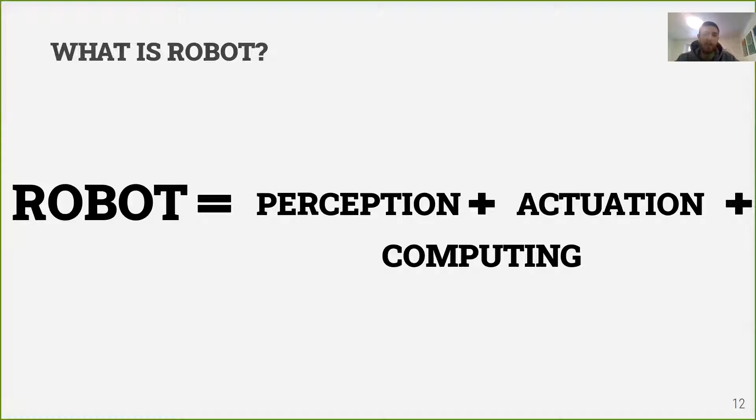It can also perform actuation, so it can interact with the physical world, like move objects, maybe touch something. And also definitely a robot is something that performs computing, some type of calculation or thinking process. So for these three actions, robots are equipped with three different parts: sensors, actuators, and computers. And all three parts are really important and cannot exist and operate one without another.

It's interesting that when we talk about computers, we often imagine modern computers, right? Something electrical which works with current and can perform computations, but it's actually not always the case. For instance, NASA has a project where they built a fully mechanical robot. It only consists of gears basically and mechanical parts, but it still can perform some computations. So basically it has a computer.

If you've ever been to a technical museum, they always have these calculators which are purely mechanical but still allow you to perform some computations. So computers are not always something modern and electronic as we imagine. The same applies basically to sensors and actuators. So it's still not really clear what a robot is.

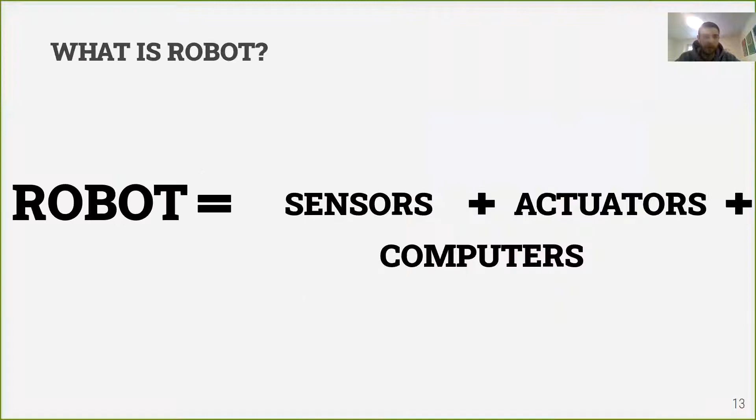It has temperature sensors and encoders because it knows the temperature of the water and speed of rotating, right? It has computers definitely because it has buttons and different modes of operation, and it has actuators because there's a motor inside which can rotate it. So according to our definition, especially this really broad Oxford English Dictionary definition, a washing machine is a robot. And the same applies to an electric kettle, satellite, or RC car, automatic transmission in your car.

So how do you think we can distinguish a robot from just appliances? Any ideas maybe? Come on, don't be shy. Maybe somebody knows. So my version is...

I would say that a robot is something that has all three of that - sensors, actuators, and computers - but also something that has an operating area outside of its body. So a washing machine and electric kettle, for instance, interact with the physical world inside themselves. We have water inside the kettle, and we have our clothes inside the washing machine. So they interact with the physical world, but only inside their body. Usually those are considered more appliances than robots, but it really depends.

Among these, I would say that a satellite is definitely a robot, and automatic transmission is definitely a robot. Considering an RC car, it depends really, because not every RC car has sensors. Sometimes they're just remote controlled cars which do not have any sensors, so they cannot be considered robots in this case. But it's important that there are some robots which are remotely controlled - remote controlled mechanisms can still be robots. There are many robots, especially in space, which are remotely controlled, but they're still robots.

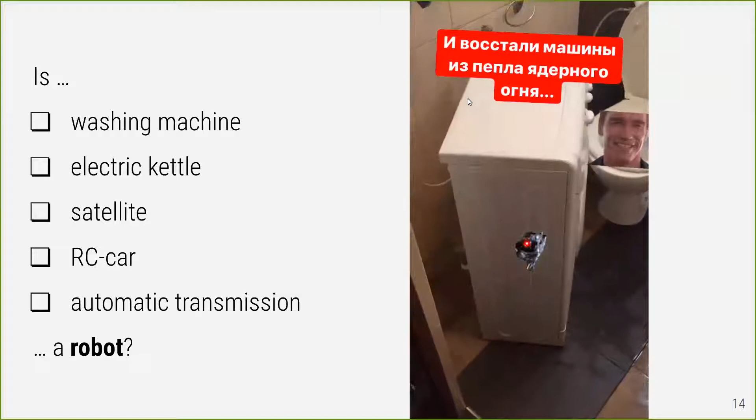As you can see, the definition is really broad, but usually we are able to tell either we see a robot or not, though there are some corner cases when it's not that easy. So there are many types of robots. As you understood already, this course is going to be dedicated to mobile robots, but we will still discuss a little bit which types of robots are out there.

So first of all, there are aerospace robots. There are many of them on the slide, all unique, different, and interesting. For instance, on the left side of the slide, there's a Curiosity rover, really famous - I guess you heard of it. Such rovers can be autonomous, and they can also be partially remotely controlled. They're used to discover other planets and space objects.

What's interesting about Curiosity is that this was one of the first rovers which used visual odometry. This is a really powerful technique in robotics - when using just a single camera, we can determine where a robot is in space relative to our starting position. This technique was first applied in space robots, and then every modern autonomous car or autonomous robot with a camera uses this technique. There are also many more interesting robots. On the right side of the slide, there's a so-called Robonaut.

This is a NASA project. They use this robot in a space station, and they've launched it already several times to a space station. It is built in an anthropomorphic way, so it can operate with all the appliances and tools which are created for people. And there is also a really interesting story about this robot.

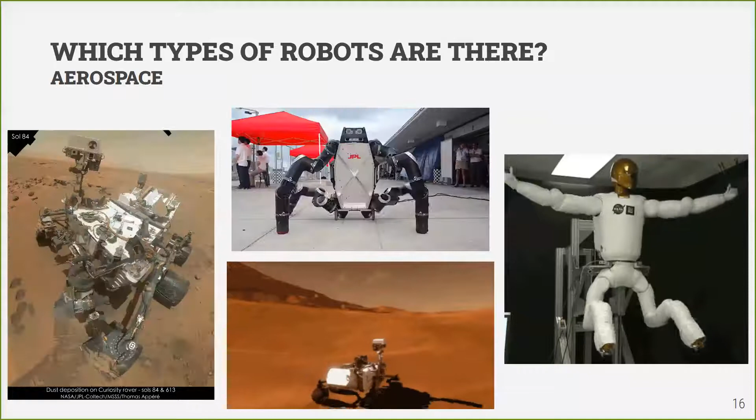So what NASA came up with: they started online translation from Earth to the space station, and they taught engineers on the space station how to fix the robot online. This operation took more than 24 hours without interruption to fix this really complex robot, and they succeeded partially - it was operational, and the mission was conducted in the end.

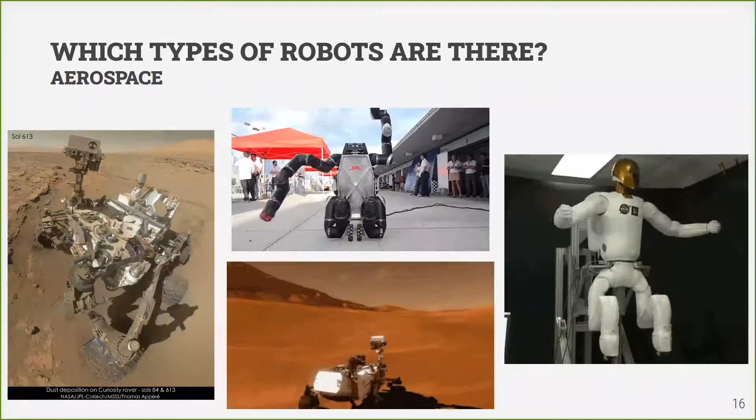Actually, industrial robots are the most common type of robots in the world - about 70% of robots in the world are such types, basically manipulators or different types of industrial robots. So there are also medical robots.

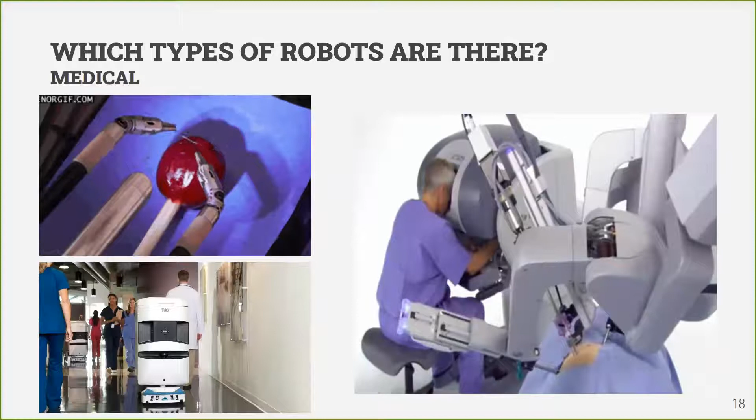And on the bottom of the slide, there is some mobile robot, used I guess in the United States, this one particularly, to distribute pills in the medical hospital. It just travels around the hospital and distributes different types of medical pills and things like that.

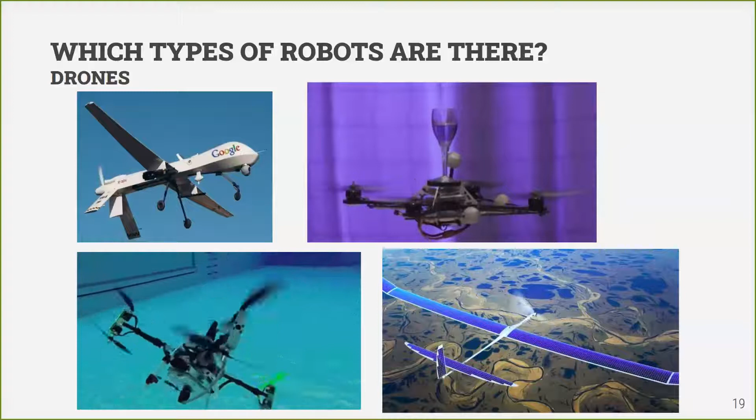So there are also so-called extreme robots, and the field of robotics is called extreme robotics. Those robots are used for so-called 3D jobs - dirty, dangerous, and demeaning - basically jobs which we as people wouldn't prefer to do.

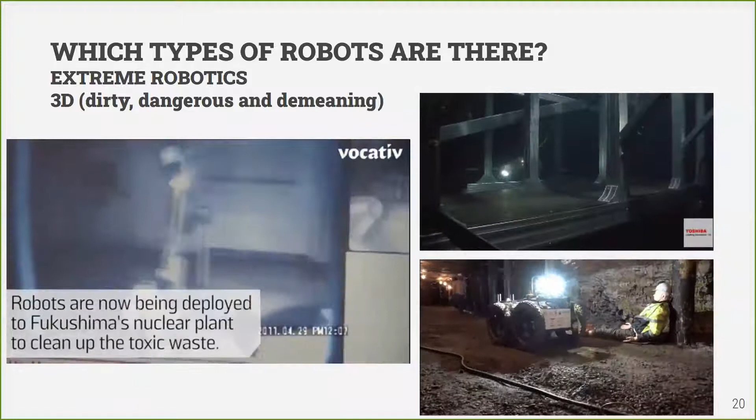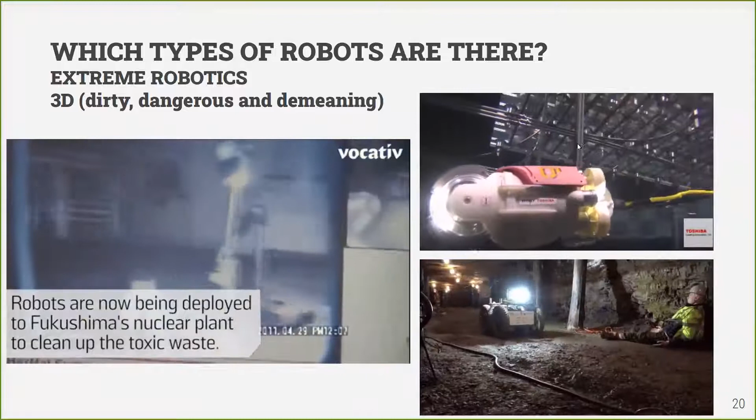So on the left slide, for instance, you can see robots used in Fukushima. This is the nuclear station disaster which happened in Japan, and they applied many robotics solutions to fight the disaster, to search for people, to check radiation, and so on. There are also underwater robots used for dangerous areas, for example, for monitoring.

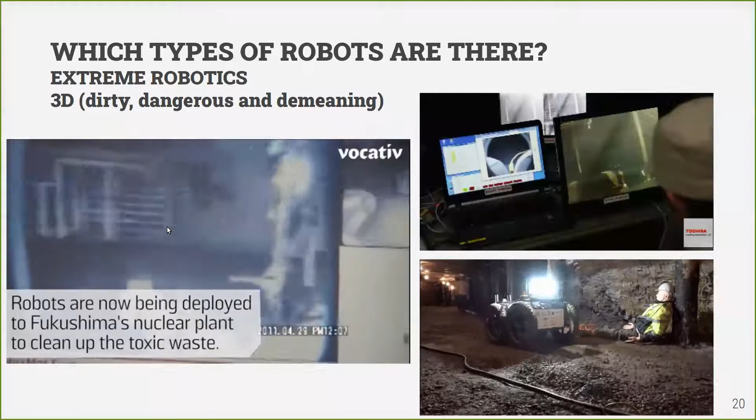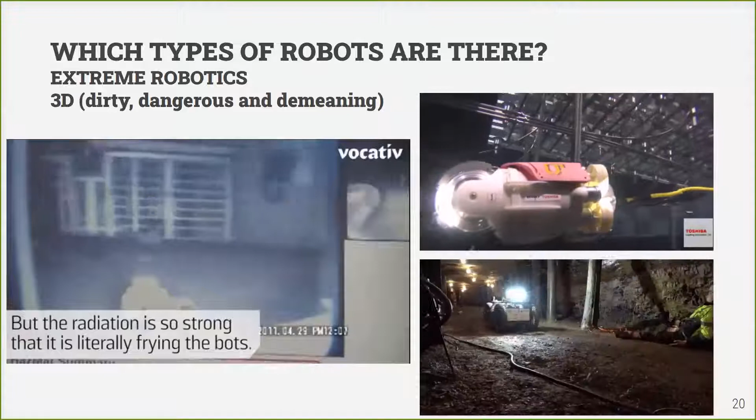Many kinds of robots - such robots are usually teleoperated or remote controlled, as you can see in the animations, because they operate in really, really complex environments. It is sometimes really hard to make them autonomous, to make them decide autonomously how to move through this environment, how to perceive it, and so on. So these types of robots are usually remote controlled, but it doesn't make them less sophisticated.

So obviously there are military robots. You can see some robots from Boston Dynamics, but interestingly this walking robot in the bottom right corner is also from Boston Dynamics. This one was built to test military clothes, to study how convenient and durable they are.

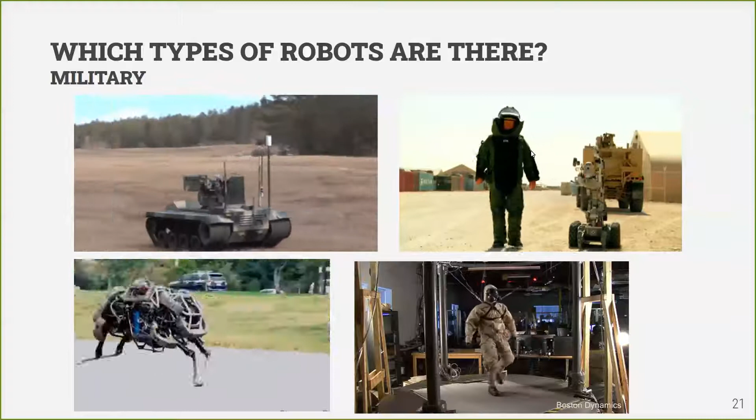Boston Dynamics is famous not only for four-legged robots but also for these types. Many military robots are used to deal with bombs, and as you can see in the top right animation, this is actually from a Hollywood movie, though I don't remember its name.

There are also educational robots for kids, and not only kids. I started my path in robotics with such a robot, a dancing one called Nao, from the French company Aldebaran. This robot is really cool, and there are many scientific papers using it for research.

It actually has 25 degrees of freedom. Even though it's really small, it's really complex. You can perform interesting moves and actions with this robot, and it's equipped with many sensors, so it's a good research platform if you're interested in humanoid robots.

There are also famous Lego kits which can be used to build real robots. This is one of the fastest robots solving a Rubik's Cube. There's a whole competition of building such robots from Lego, and this one solves it in about 3 seconds, which is close to the world record.

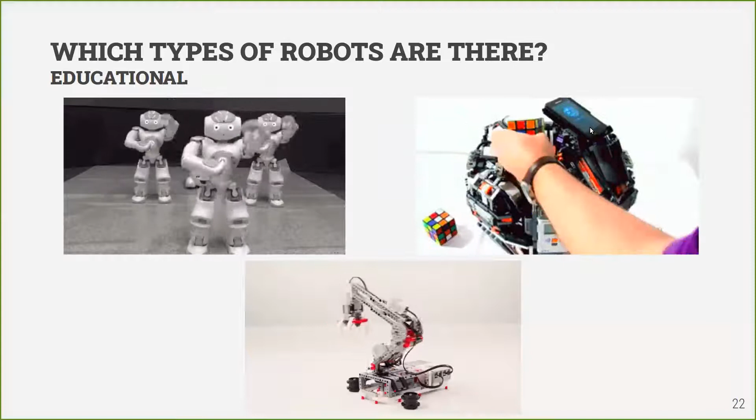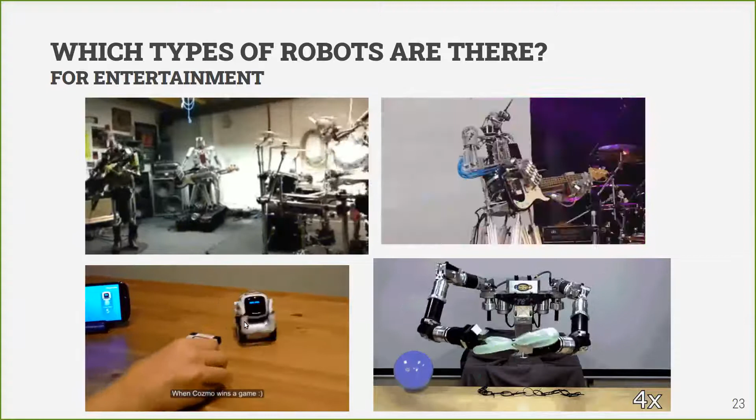There are some more toy-like robots, but they're still quite complex. What's more, there are exoskeletons, and there's actually a big discussion about whether to call an exoskeleton a robot or not, since it's just a type of mechanism. But again, it has actuators, computers, and sensors, so it can be called a robot.

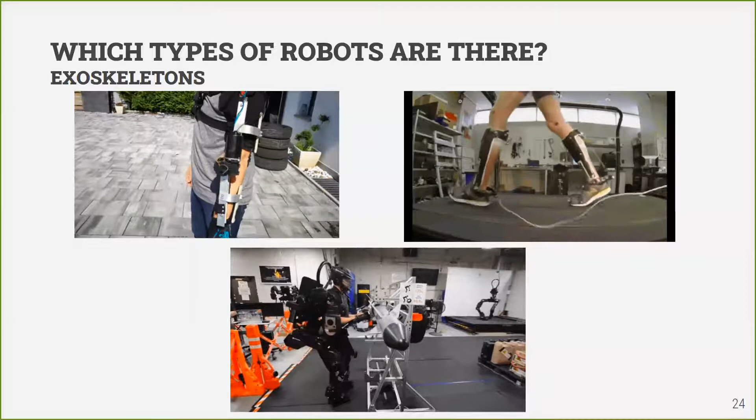These exoskeletons are used to empower people, for example to lift more weight than usual. They're also widely used for rehabilitation, for people who got into some kind of trouble, used for arms and legs. There are several companies in Russia, well-known ones, for instance ExoAtlet, building these types of exoskeletons.

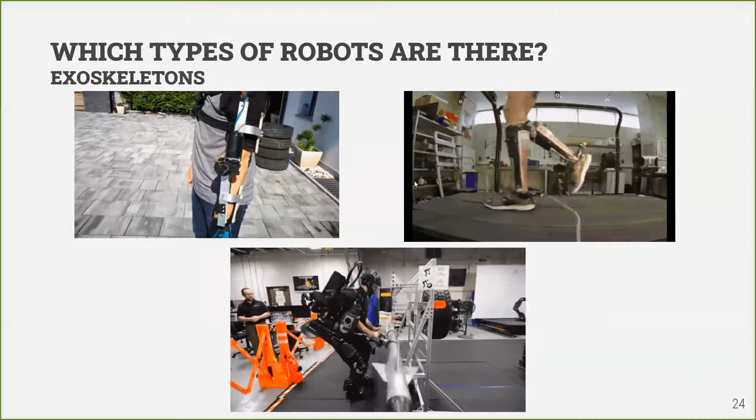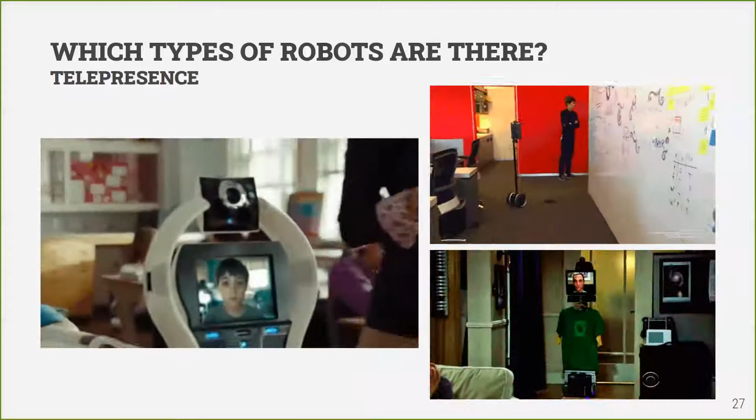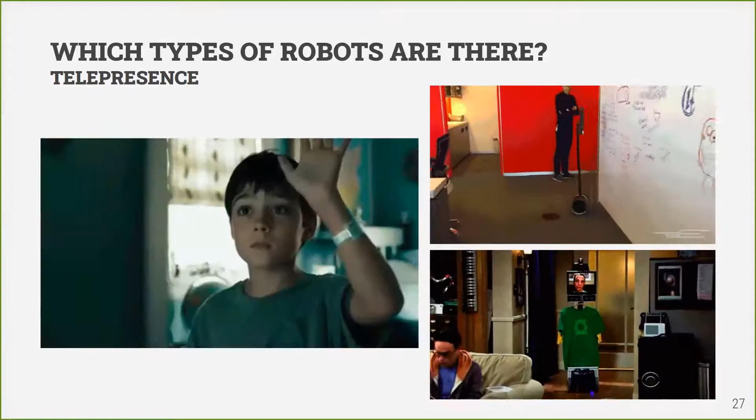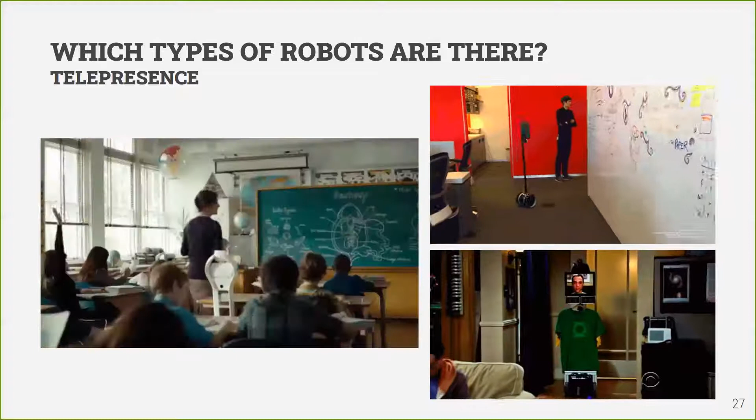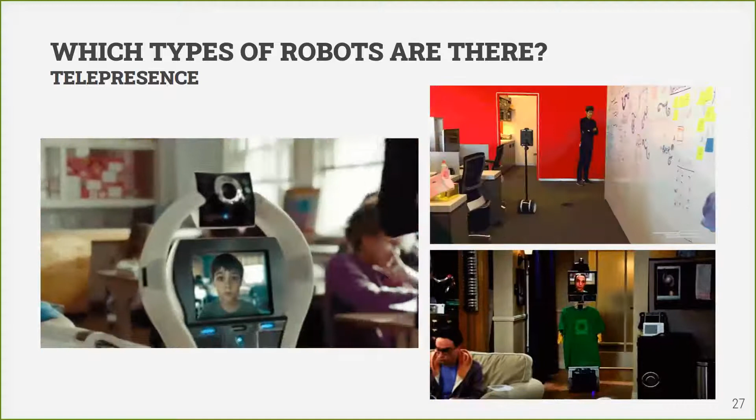A couple of years ago there was a boom of telepresence robots. The main idea is that you can be somewhere else just using zoom on wheels. Basically any telepresence robot is a mobile robot you control remotely to move through space, with a screen that presents you and a camera so you can see your surroundings. The idea is you can attend lectures, classes, meetings just by using this robot. As far as I know, this is still not really popular, even though many companies are working in this direction.

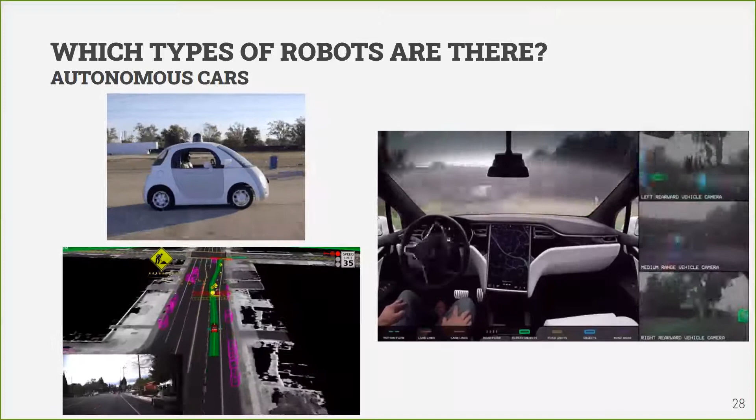So, this is the closest category we will discuss in this course, because this course is on mobile robotics and basically on wheeled robotics. So all algorithms we will discuss in this course are applicable to autonomous cars and are really used in autonomous cars.

So there's the whole field of bio-inspired robots. This is when we try to replicate what nature created in our robots, because there are really cool things in nature and different types of animals which we would like to have in our robots.

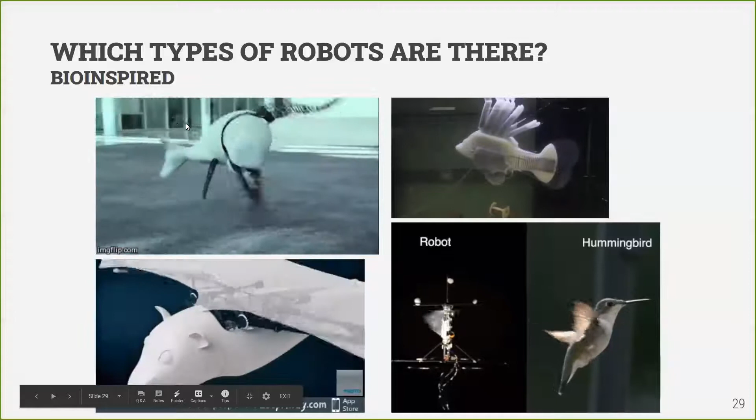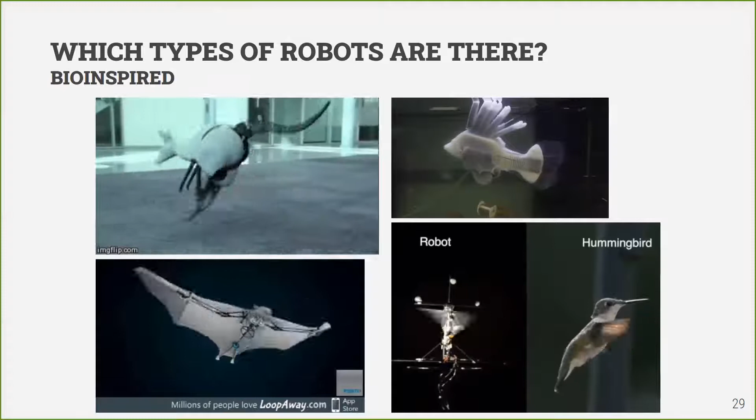There is a really cool company called Festo. Festo is actually a company creating pneumatics equipment, but every year they come up with some type of robot which uses pneumatics. So these two, kangaroo and the bat, they use pneumatics from Festo to operate. Every year, to promote the company, Festo builds one type of robot looking like an animal. They already had kangaroo, butterfly, bat, spider, and many more. Just Google Festo robot and you will be impressed how cool the robots they built are, even though they're not a robotics company. Their equipment is used in robotics a lot, but they're not a robotics company.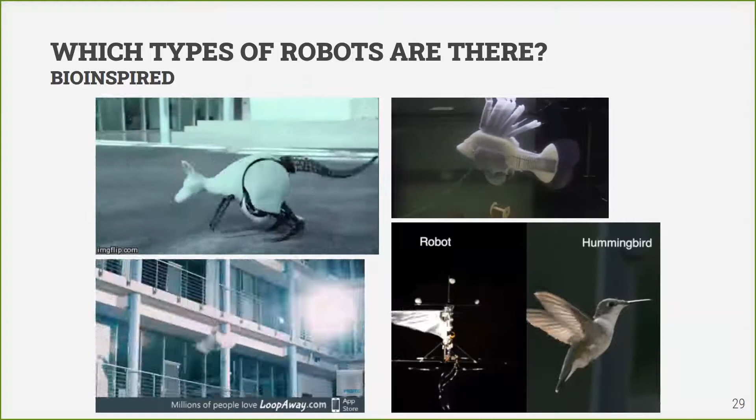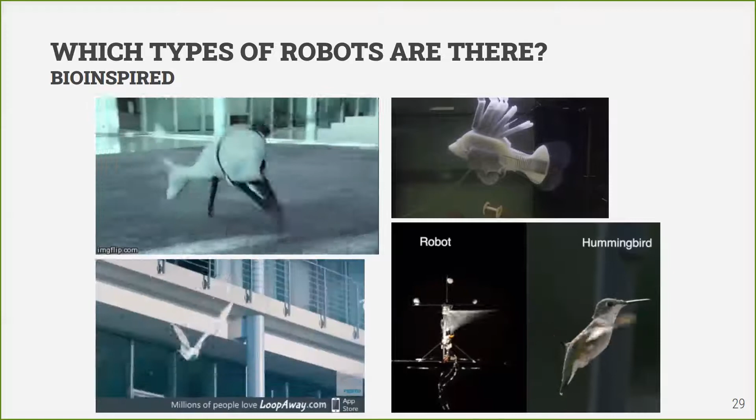But this is really fascinating, the robots they built. I recommend you Google Festo robot and see some cool videos. There are also robots which operate like birds, fish, and many more. There are some cool worldwide known laboratories, one in Switzerland, one in United States, which only work on bio-inspired robotics. They discover some animal properties and try to replicate them in their robots.

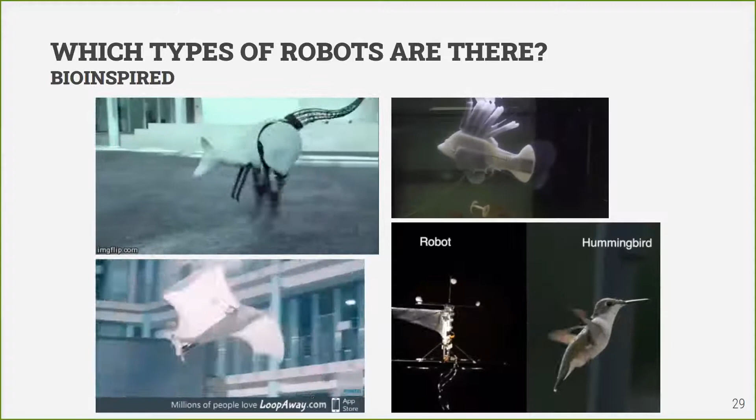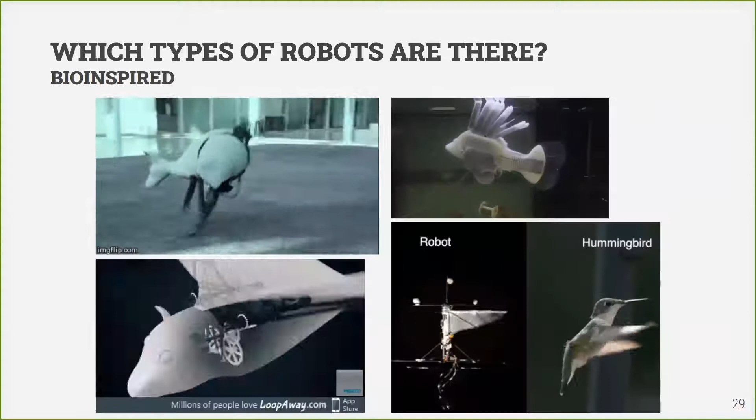So one of the modern areas in robotics is soft robots. As you could see, many robots we usually see are still built from metal, and it really limits their capabilities, because many things can be performed only by a soft mechanism. Our tissue is soft and our limbs are really flexible. So there is a research area of soft robotics which tries to use these soft actuators, actuated usually by air or some other type of gas. And they have really cool results.

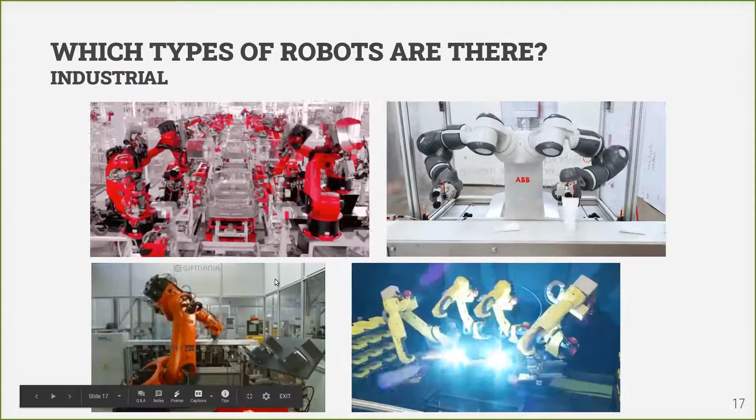to operate with an egg. They were building some automatic kitchen. The idea was to cook different types of dishes with robots. They really spent the whole year to teach such a robot to operate with an egg without destroying it. It's really complex. Even though for us, for people, it seems like a really simple task, for robots it is not.

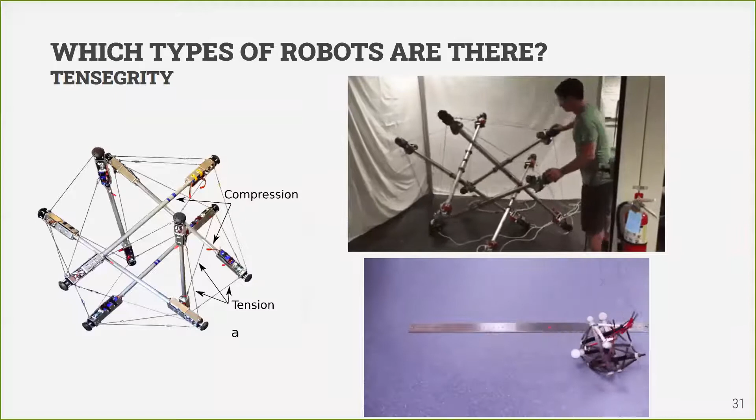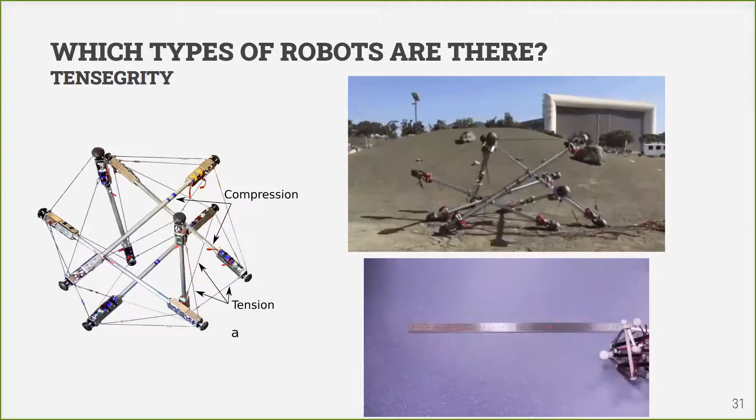So these robots came from the aerospace field, and they were first created for Mars discovery, because the terrain on Mars is really complex and you cannot use just a rover with wheels to overcome some terrain there. You cannot always overcome rocks and stuff like that. So for that, engineers came up with tensegrity robots, which move really slowly, but because they're so flexible, they can overcome really complex terrain.

So this was a short overview of robotic fields. Maybe you have some questions right away on some types of robotics.

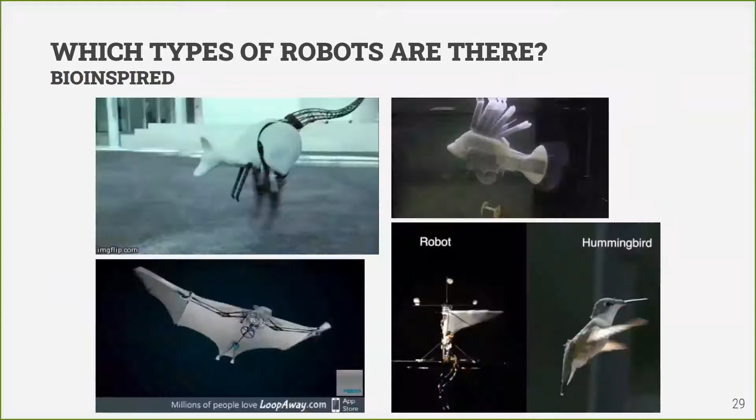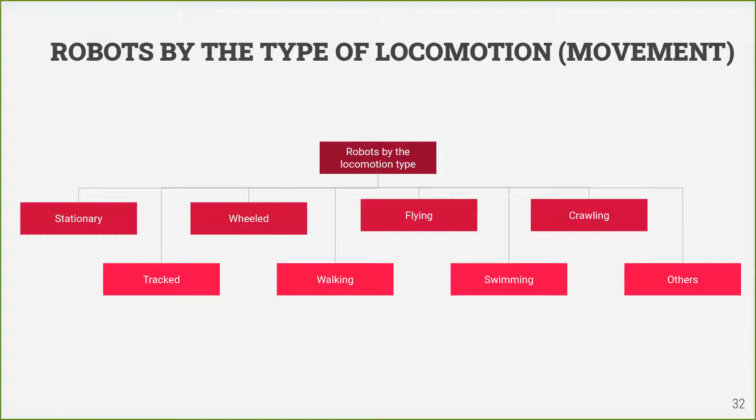Okay, no questions. So then we will go further and we will see which types of locomotion are there in robots. Locomotion is a type of movement. So there are wheeled and stationary robots. As you can understand from the name, stationary robots are not moving at all. Wheeled robots use wheels to perform locomotion or movement in space. There are flying robots, crawling, swimming, walking, and you have seen all different types on the images on the slides. So there are some examples, tracked robots as well.

There are other types of robots. For instance, this robot is called Tarzan. This is a robot which used to check wires. Basically, this robot can monitor wires. If there is some damage, it can tell. And it uses two different manipulators, two different arms, basically, to walk over these wires. That's why there is a category called others, because there are many weird types of robots using different kinds of locomotion.

But the general ones are wheeled, tracked, walking, flying. So in this course, we will actually talk on wheeled robots. Even though there are different types of locomotion, wheeled robots are the most common at the moment because they're most simple and most convenient. So wheels are really cool mechanism which allow you to overcome different types of obstacles, terrain.

You can see the autonomous cars evolving. You can see vacuum cleaners which also use wheels. Basically, all algorithms we will discuss during this course are also applied to tracked robots, and mostly apply for walking robots, any type of robots which use path planning, localization, with some peculiarities. So the general algorithms are applicable everywhere, but there are some small parts of these algorithms you have to tweak to use in different types of robots. But as a reference, we will think on wheeled robots during this course.

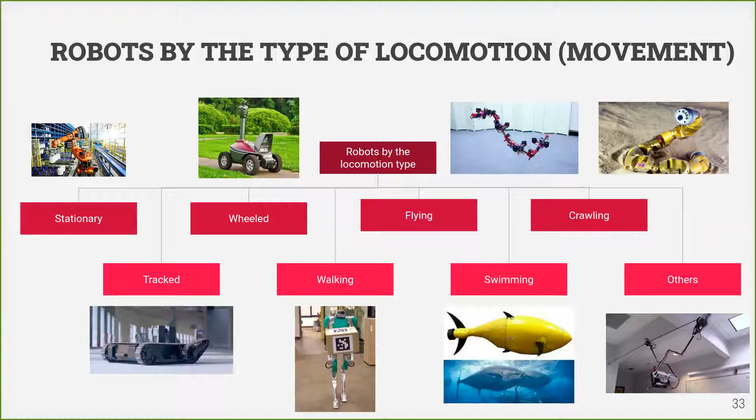And here I wanted to make a small off-topic talk on why actually I'm telling you about mobile robots, and why mobile robots are so important for me, and maybe just make a small PR, maybe somebody of you will be interested. So I'm a researcher from Institute of Information Transmission Problems of Russian Academy of Science. This is a huge institute which has different types of research in different directions, and one of them is robotics. And I'm leading the mobile robotics group there.

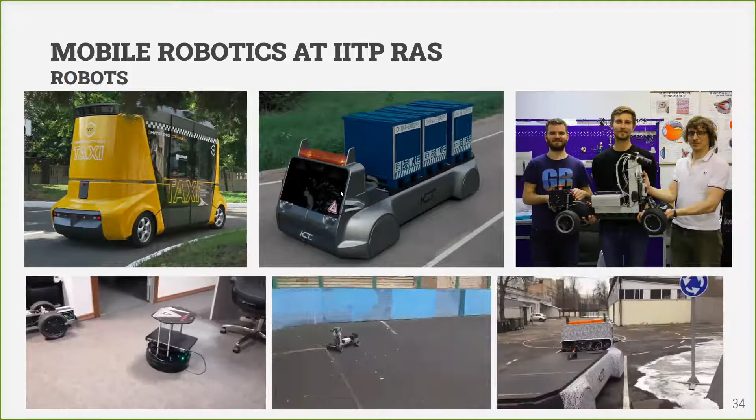So these are types of robots we are working on. All these robots on the slide, these are robots which were programmed by us, and we took part in the development of all of these robots. As you can see, starting from really small indoor robots to huge autonomous buses and cargo vehicles. So we are performing research in all these directions.

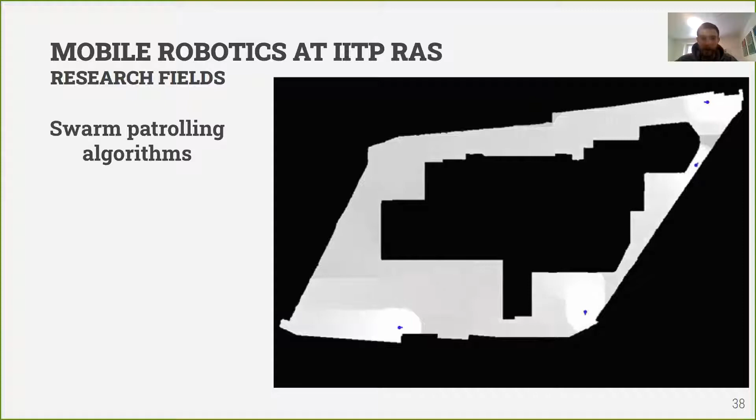We also work on swarm robotics. This is a field we didn't discuss, but basically swarm robotics is when you try to perform a single task using a group of robots. It's also a really hot research topic right now. It is not really new, but still an evolving field of research. For example, on the slide here, you can see an algorithm we developed. This is stochastic patrolling. The main goal here is to patrol an area, to visit every point on the map in a way that nobody from the side can predict where robots will move next. You can see that robots are moving really unpredictably, but still they cover the whole area of patrolling. This is the type of algorithms we are working on in our lab.

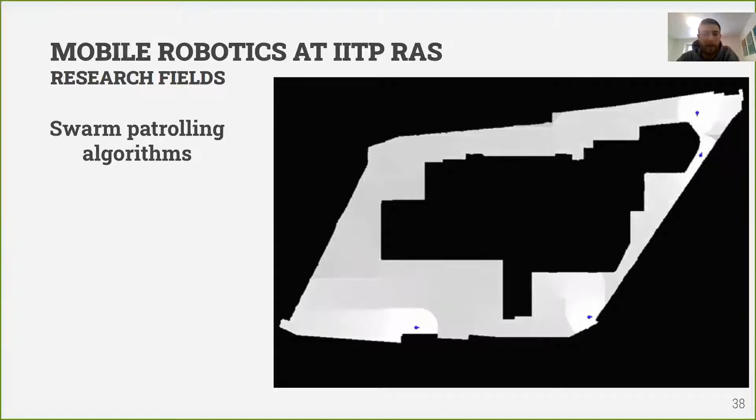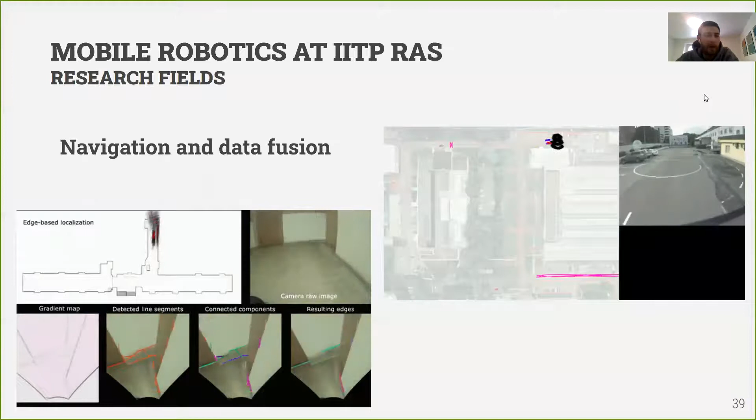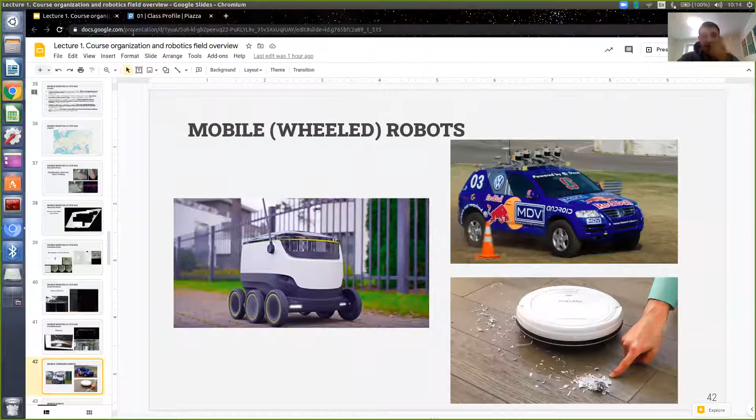So we are also in our company working on mobile robotics a lot. We are basically building an autonomous logistic vehicle for warehouses, for factories, and other types of enclosed territories. And we also have a lot of research areas. We're also publishing papers, so if somebody of you guys are interested, you can just text me and we will discuss possible areas of research.

And returning to our lecture, talking on mobile, or actually, as I said, mostly on wheeled robots, once again, I wanted to tell you why this is the right type of robot to study.

So as you can see here on the slide, there are many types of wheeled robots, and I hope you all have seen a vacuum cleaner, which are really popular and common right now. There are also autonomous cars, there are also rovers, and different types of delivery robots, or so-called last mile robots.

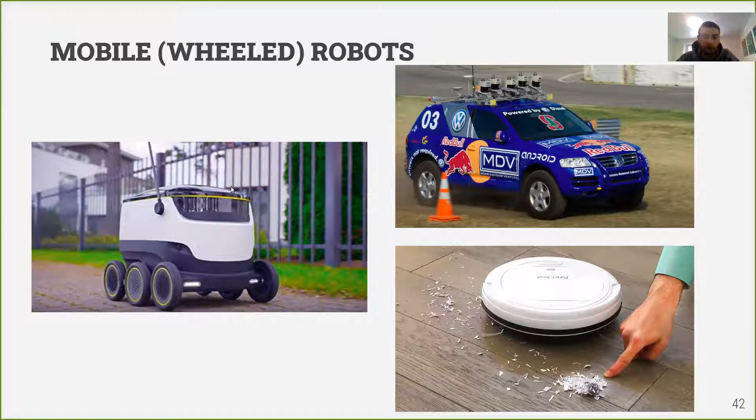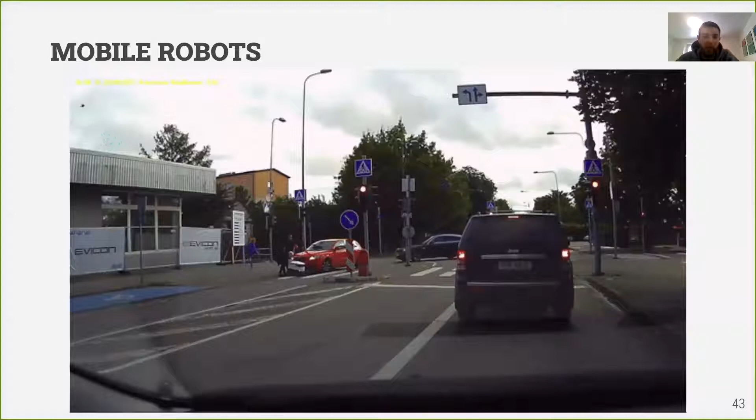So yeah, this is actually a cool video from Estonia. This small guy, a delivery robot, is hit by a car, and random people are trying to save it. This video shows that there are still many problems in mobile robotics and open issues which have to be solved. These robots can be operated in complex environments, but still.

So why mobile robots? Because they're simple in construction and control. It is much simpler to build and operate a mobile robot or wheeled robot than a humanoid robot.

Also, they're maneuverable. They can turn in place sometimes. They have a small radius of turn, so they can operate and turn their direction fast, and they're fast. If you could see these walking robots, they're still really slow. If we are not talking about Atlas, of course, it is kind of fast, but still really clumsy.

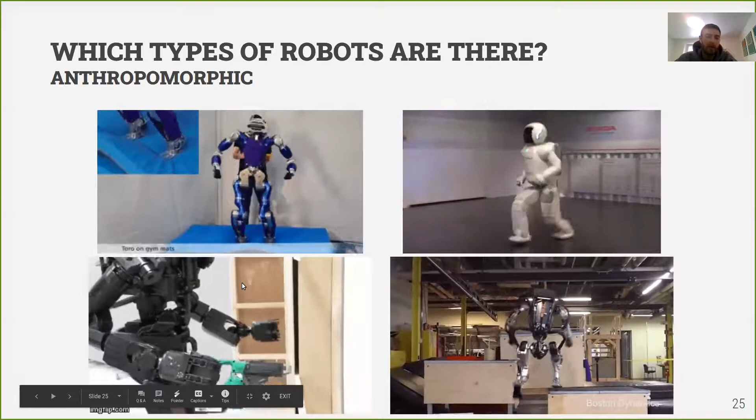But all other types of walking robots are really slow, and complex, as we already said many times. So these mobile robots are really common at the moment. After industrial robots, I guess they're the most common type of robot in the world. They're used a lot, and that is why we are studying mobile robots, because I guess the future is in mobile robotics.

So this is a control scheme of a modern mobile robot. As you could imagine, there are many types of algorithms involved in the operation of a mobile robot, starting from sensors, which allow us to perceive the environment and know something about the world around us, and ending with actuators, which we use to travel through the environment or to interact with it in some way. In between, there are many algorithms, but to simplify, we will divide them into three big categories, which we will discuss during this course. For instance, next lecture will be on localization.

So as I said, sensors allow us to perceive information about the environment. Localization is a type of algorithm which allows us to understand where we are in the world, and for that we usually use a map. There are algorithms which do not require a map, but they're quite complex and we will not discuss them in this course, maybe just briefly. Usually we use the map of the environment, and then we use localization algorithms to answer the question of where we are in this map.

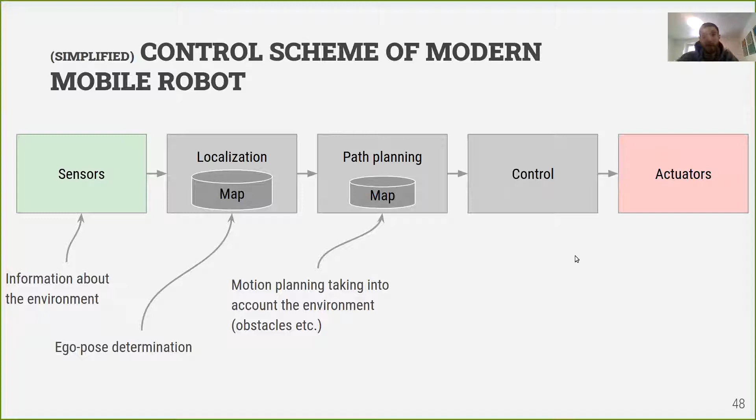So there was a grand challenge organized by DARPA. This is an American defense agency. So they organized really cool competition for autonomous cars. It was back in 2004, and they had this competition many years in a row. And Stanley was the first winner. And actually, first year there was no winner. So first year, there was no team which was able to complete the whole track.

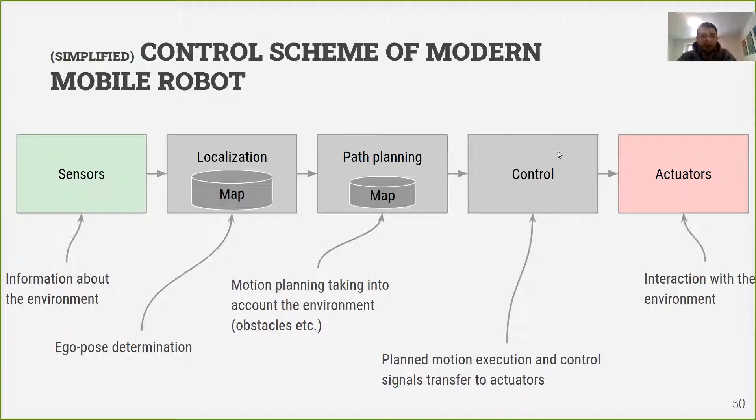So starting from sensors, we can divide sensors by two categories. So by registered signal, there are active and passive sensors. So for instance, a camera is a passive sensor because camera doesn't emit any type of signal, right? It only collects visible light to project it on a screen basically, or store it in a digital memory. So camera is a passive sensor.

And if you have some type of sonar, which is sound radar, it is active because it first emits some sound wave, then measures time between emission and receiving back this sound wave and makes some calculations based on it. So active sensors are usually more precise because they control the signals they emit.

But there are many problems associated with active sensors. For instance, if there is no complex encoding scheme in these sensors, they start interacting with each other. If there are two sensors close to each other, they start to interfere and spoil the signal of each other. In modern sensors, there is a really complex encoding scheme, so each sensor is kind of unique, and they can distinguish between their own signals and signals of other sensors.

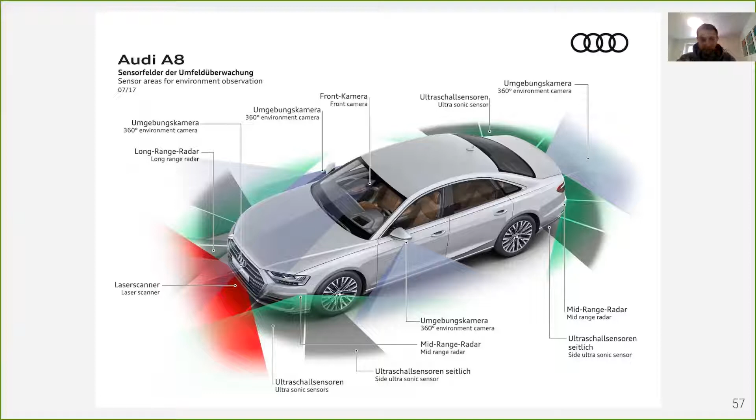They also have a cliff sensor. You could see these cool demos when you put a vacuum cleaner on a table, and it never falls down because it has this cliff sensor. This is basically a distance measuring sensor which can tell that distance changes sharply and fast. Based on that, the robot can decide it reached the edge of the table and has to rotate and turn back. They also have gyroscopes, accelerometers, so many types of sensors inside such a small and simple robot.

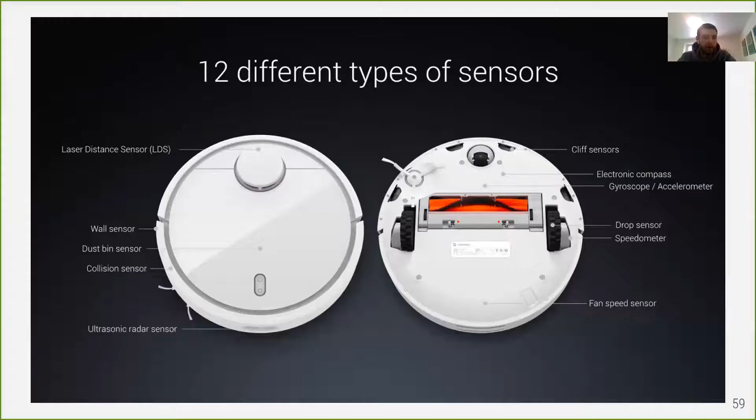So we'll talk about all types of sensors a bit in more detail, just for you to understand how they work. We'll start from the encoder. It's an electromechanical device that converts the angular position of a motor to an analog or digital output signal.

So basically it is really simple. Encoders are usually attached to the shaft of the motor, a rotating shaft. There is usually a light source, some code disk which has holes in it, and a detector. By rotating, you get a pattern, some binary pattern where light is on and off because of rotation of this disk with holes. Then you can tell how much your motor has rotated based on counting of these dark and light periods.

So there are more sophisticated encoders which use a complex type of encoding. This is used, for example, to tell to which side the motor is rotating, because if you just use the simple disk with holes, you cannot tell to which side you're rotating. You just see light and black spots, and they're invariant to the rotation side.

So there are optical encoders which use light and detectors. There are also magnetic encoders which use Hall law, Hall principle, and static magnets, just to tell whether there is a magnet in front of the detector or not. But the principle is the same.

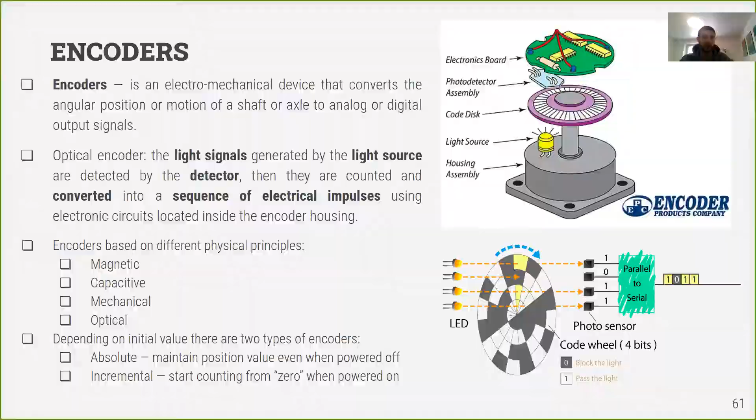Yeah, and here are some images showing how encoders work. This is a type of encoder with encoding, so each angle corresponds to some binary code. Because we have this complex disk with holes, we can encode different angles with real binary code. There are many types of such encoding. You can see different types of these disks on the slide.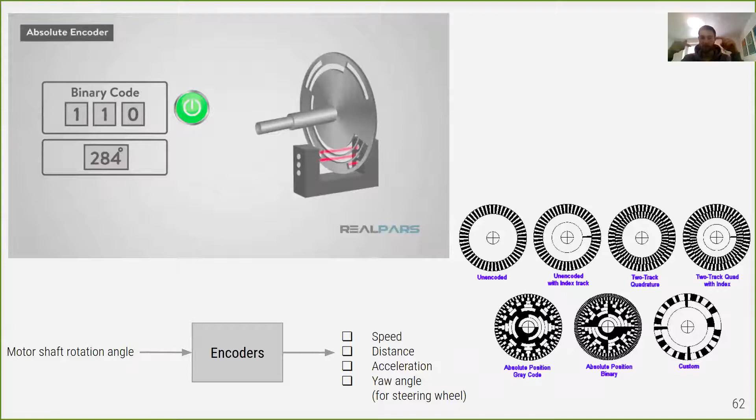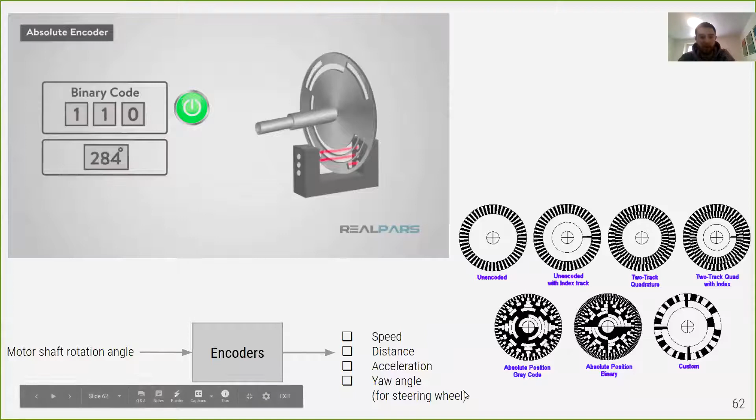If you have two encoders on two wheels of a car, you can just imagine a car. If you have two encoders on the right and left wheel, by the difference of rotation we can calculate how much the car turned, right? So if the left wheel is moving faster than the right wheel, we know that we are turning, and we can even calculate how much we are turning. So such a simple type of encoder, such a simple type of sensor, gives us a lot of information.

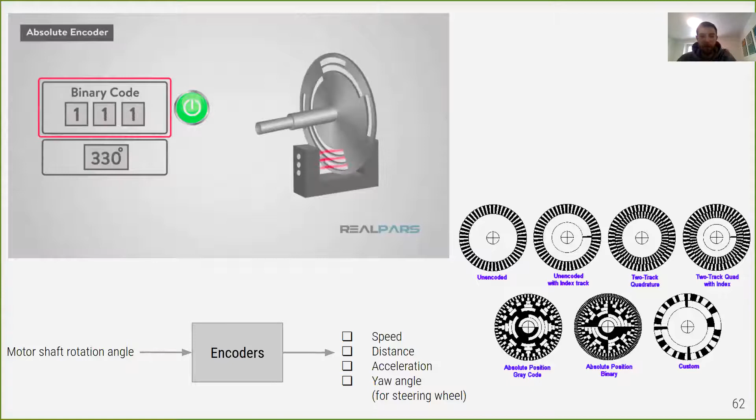So usually encoders are not really precise in big robots, in mobile robots, but they at least give us some rough approximation. So there are also inertial measurement systems called IMU, VRU, AHRS. You can meet all these abbreviations, but we will usually call it IMU, inertial measurement unit. This is the most common one.

IMU is a sensor which actually has several sensors inside. It has accelerometers to measure acceleration, usually in all three directions. It also has gyroscopes, which you use to estimate angle of rotation or angular speed. Sometimes IMUs also have magnetometers and altimeters to tell the height, because these sensors are often used in quadcopters and different types of drones. Sometimes the height above the ground is important. That's why they also have these magnetometers and altimeters.

And this group of sensors allows us to measure linear acceleration, angular speed, and magnetic field as input, and allows us to estimate our own acceleration, 3D position in space via integration. So if we know acceleration, we can integrate it twice and get the distance traveled, right?

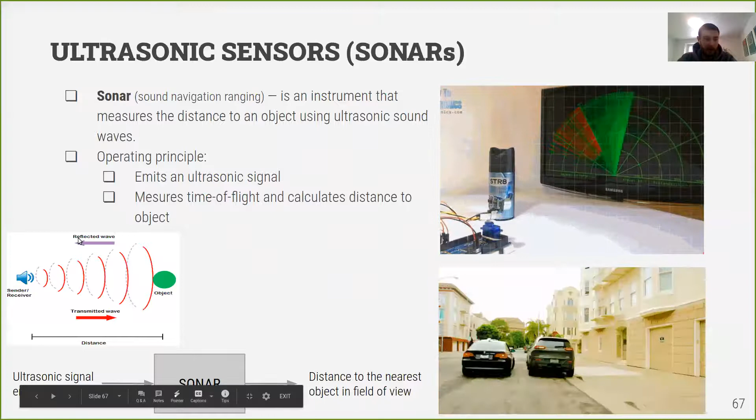They're not as precise as laser, but they're really cheap - you can buy them for $1, I guess, for such a system. They're used a lot in modern cars, and in mobile robots they're also really used. As input, they use ultrasonic signal, and as output, they have distance to the nearest object.

It's important that in LiDARs, we have a really narrow laser which measures one direct point. Here, with ultrasound, we emit a wave, that is why it has some radius basically, and we cannot tell exactly where the object is in some area. We just know that in a particular area there is an object at a particular distance, but we cannot determine where exactly inside this area.

The same principle applies for radar - you all heard of radars. It is the same, but only uses electromagnetic radio emission. So we emit a radio wave, measure the time it travels to the object and back, and make some conclusion on the distance to the obstacle. Also, using the Doppler effect - the change of wave period depending on the speed of the detected obstacle - we can also tell the speed of an obstacle. This is really practical and a good feature of radars.

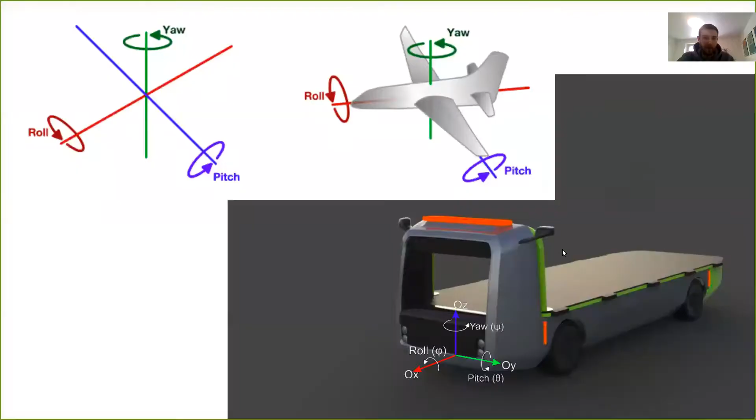What's cool about cameras is that apart from all these sensors, camera is passive. It doesn't emit anything. It just collects the light which is out there already, reflected light.

So in terms of spatial resolution, camera is the most precise sensor, but camera on its own doesn't give us information on distance. We cannot tell just by an image how far an obstacle is. This is the main drawback of camera. We have to come up with really complex and sophisticated algorithms to use cameras for measuring distance.

So camera collects reflected electromagnetic emission, and it can be not only visible light. For instance, there are X-ray cameras, there are infrared cameras, and infrared cameras are also really cool sensors because they allow us to see in the night.

As output, we have an image, which we can use for different types of problems: classification, object detection, semantic segmentation, and many more. There are also depth cameras. These cameras allow us to overcome the drawback that we cannot measure distance.

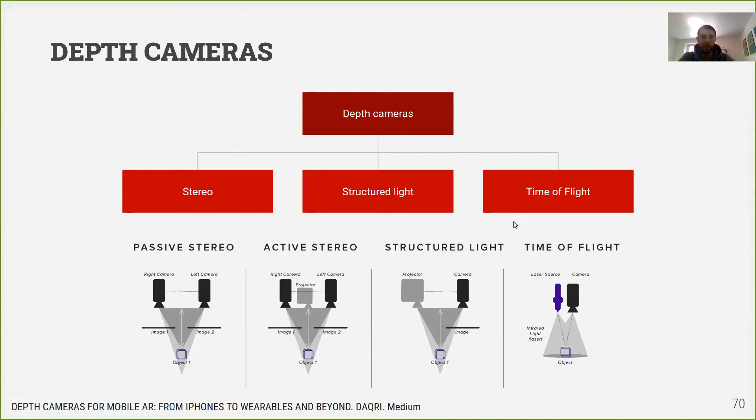And there are also time of flight cameras. There is a laser source which, point by point, sends a laser signal, and there is a camera which receives this signal, and again, measuring time of flight can tell how far this point is from the camera. So there are many ways to use cameras to measure distance and make it even more convenient to work with them.

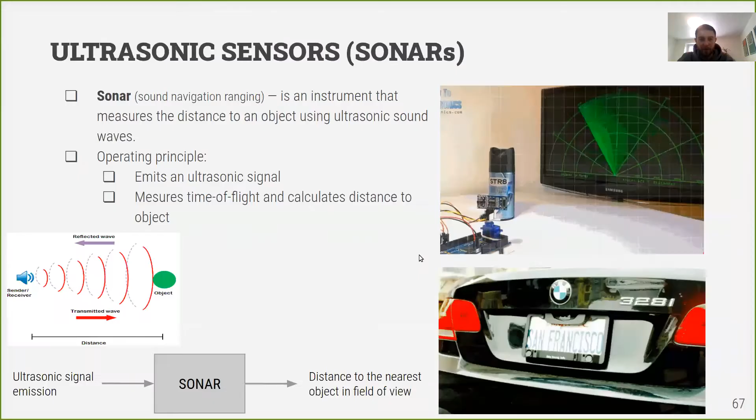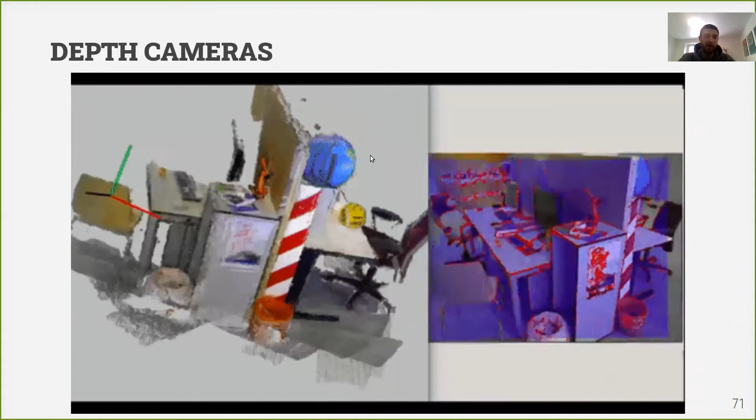And that's it for this lecture. I hope it was interesting for you. There are some additional sources at the end you can read to find out more on sensors, on different types of sensors, and how they are used in mobile robotics. I really recommend you read these additional materials because they're really, really cool and interesting.